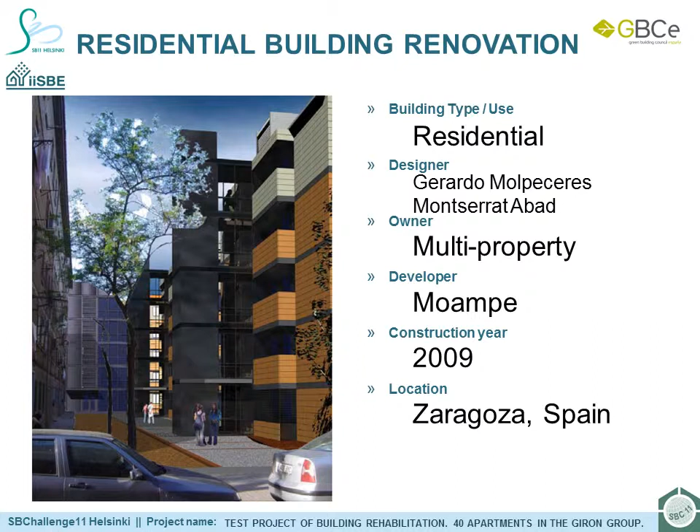Sustainable assessment of 40 apartments in the Girón Group building using Verde tool. The building belongs to one of the consolidated districts of the 50s and 60s in Zaragoza, Las Fuentes. These urban areas have a high compactness and density and a good level of equipment and social cohesion. However, these districts show lack of green areas and parking, low accessibility and very bad thermal insulation in housing spaces.

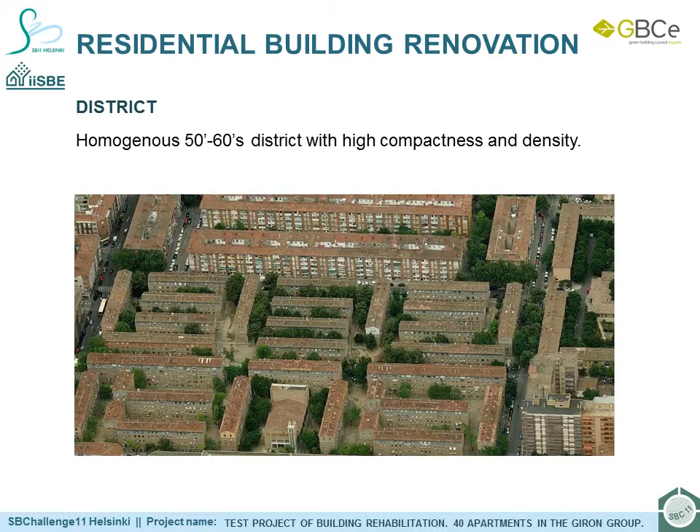The district in which the building is situated has been the subject of two preliminary studies carried out by the City Council. The first one describes the social and urban situation of the neighbourhood. The second one shows urban rehabilitation proposals based on a social and technical analysis of 8,000 residential units.

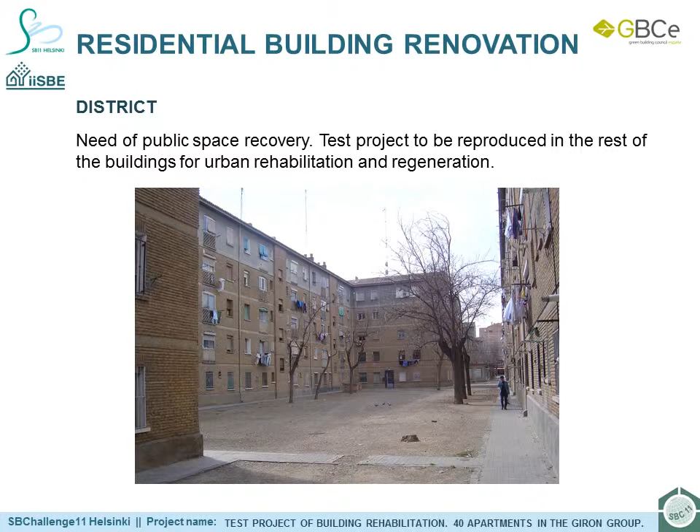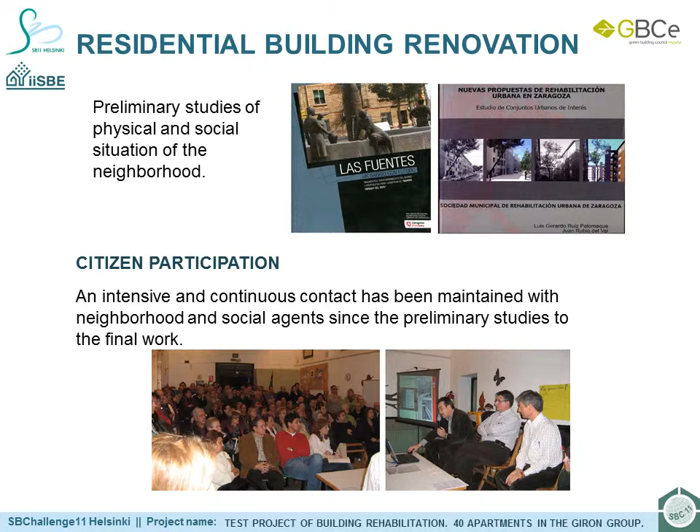The citizen participation has been a very important element during the whole renovation process. An intensive and continuous contact has been maintained with neighbourhood and social agents from the preliminary studies to the final work. As a result of these conditions, a test proposal has been carried out in a 40-dwelling building. Urban and public spaces surrounding the building have been of a great significance for the project, since the main aim of this programme is the urban rehabilitation and regeneration of the district and other similar neighbourhoods.

The original 5-story building is L-shaped and has 4 entrances which give access to 10 dwellings each, 2 dwellings per floor including ground floor. The residential units are very small, as well as the staircases. They were not equipped with elevators. The facades in brick are a common element with the rest of the buildings of the district, which give them a strong character.

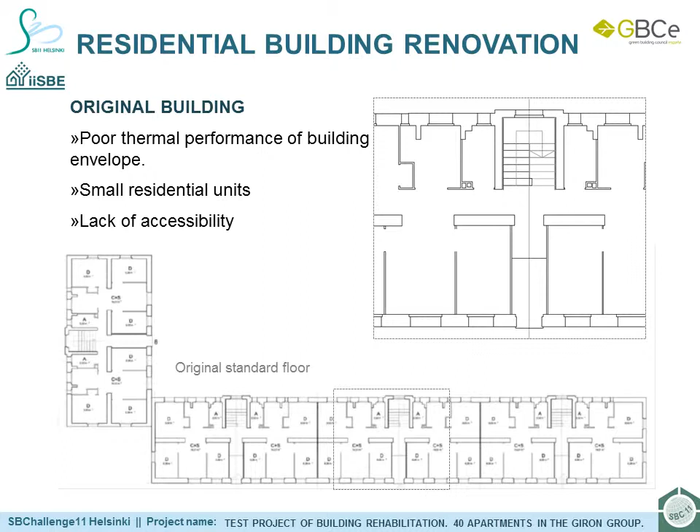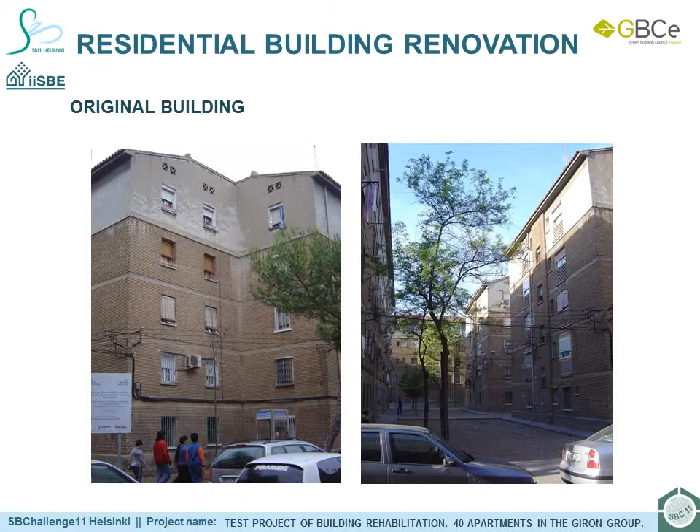The project responds mainly to the need of a severe improvement of the thermal performance of the building by means of increasing the insulation level of facades and roofs. The aim is to act only on common elements of the building, and always from the outside in order to avoid a transferal of the residents, and to avoid a decrease of the small surfaces of the dwellings. At the same time, the brick character of the facade must be kept.

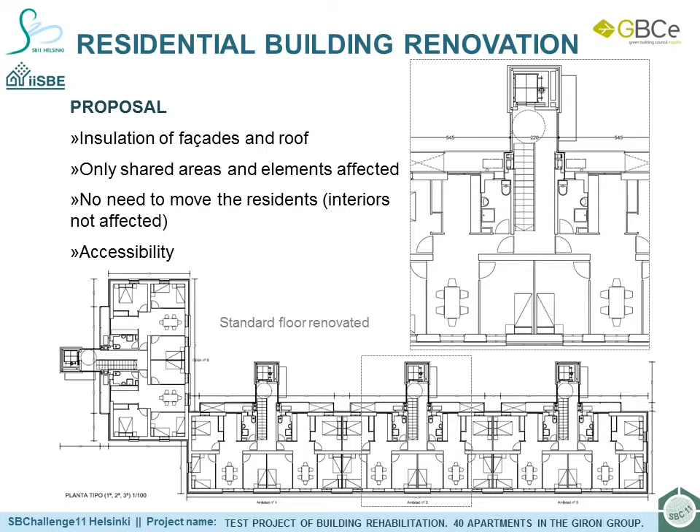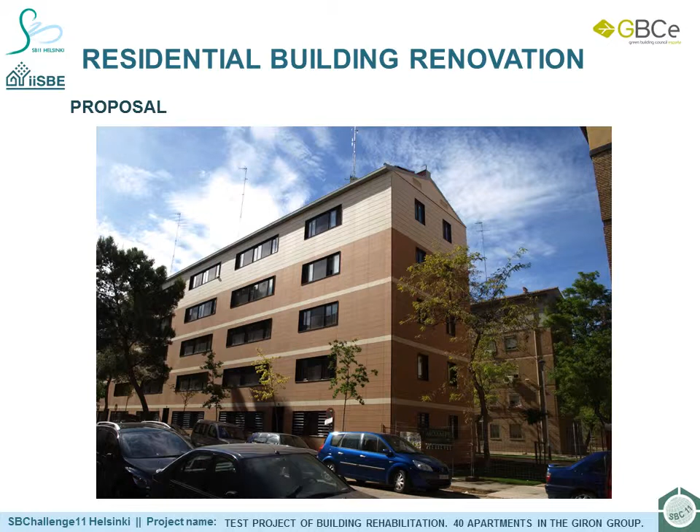For all these reasons, the solution chosen for the facades consists of a ventilated wall anchored to the original one, which is entirely kept. The finishing for this ventilated wall is in ceramic plates, keeping the brick look of the facades. Finally, the improvement of accessibility conditions was also one of the main goals of the proposal. 4 elevators were part of the project, for whose installation the staircases were slightly modified.

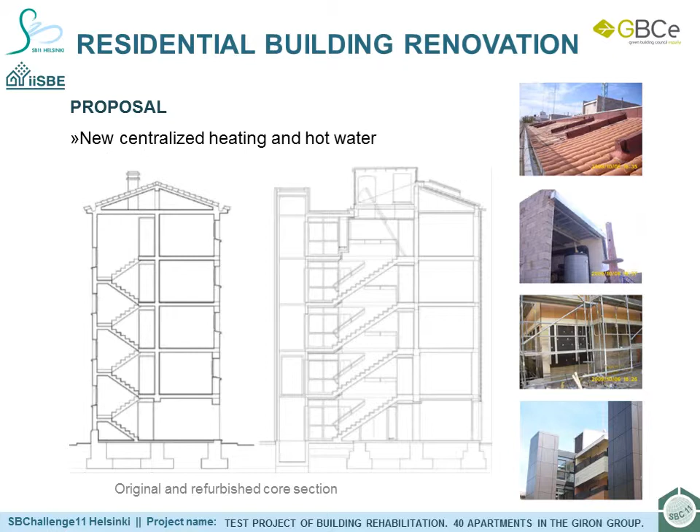The original heating system was individual for each dwelling, with a very poor performance. All the energy services of the building have been replaced and reorganized. For each group of 10 dwellings, a new centralized heating and hot water was put up, fitted with gas boiler, solar support, and independent heat meter for each dwelling. Along with the introduction of the elevators, the areas needed for the new services have required a careful design and the optimization of shared areas. 2 new volumes in each staircase house the new facilities.

The project has been evaluated by Verde tool, developed by GBC España. This tool allows the evaluation of new construction, residential and office buildings, and it is planned to permit assessment of the building on the life cycle. Verde is focused on the integration of Spanish and European regulatory standards, New Building Code, CTE, Código Técnico de la Edificación, and the implementation of the Energy Performance of Building Directive, EPBD.

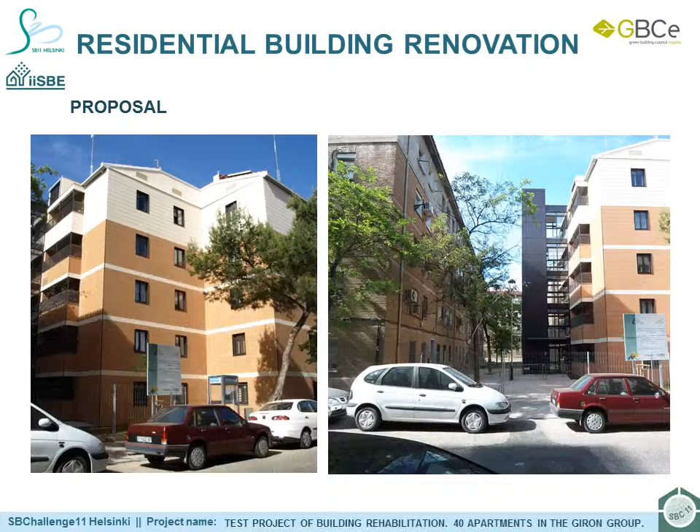The Verde assessment is based on building impact analysis, calculated as impact reduction compared to a reference building. The list of impacts was defined in accordance with CEN/TC 350 WG1 Assessment of Environmental Performance of Building, Calculation Methods. Since the project consists of a building renovation, the site selection has been determined by the nature of the intervention. As a test project to be reproduced in similar buildings, a very well-oriented building has been chosen. Also, the project was focused on the recovery of quality public space, ready for a real use.

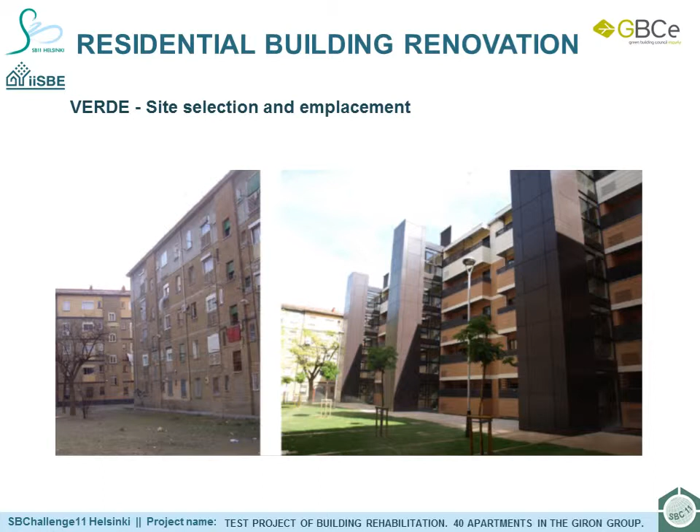One of the major goals of the proposal was to improve the thermal envelope of the building in order to reduce the energy consumption regarding the original situation. Along with the good performance of the new energy services and elevators, the improvement of roof and facades insulation enabled a great energy saving. For equal conditions of comfort, heating consumption goes from 100 before to 26 after renovation in winter, and from 100 to 37 in summer. The consumption of warm water goes from 100 before to 38 after renovation.

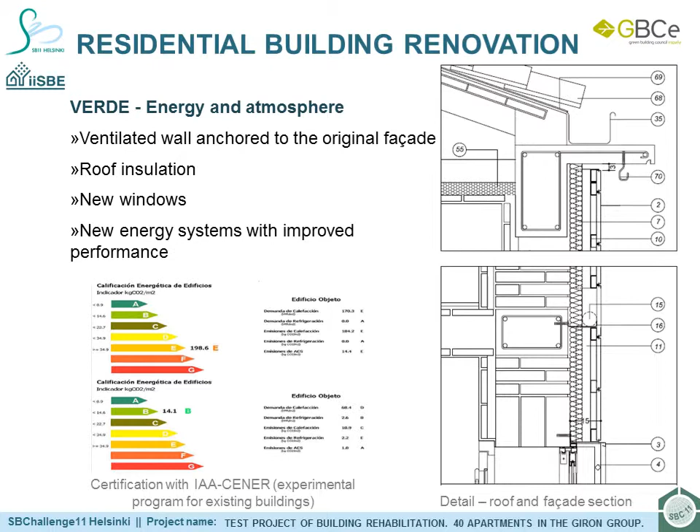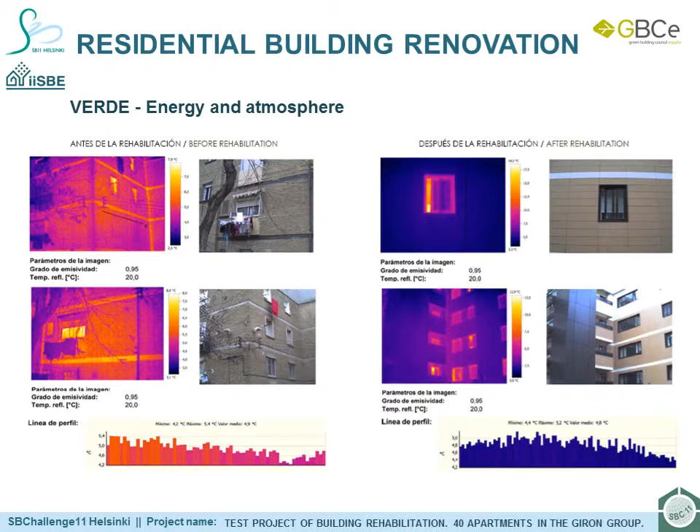The renovation has been certified with the experimental program IAA-CENER for existing buildings. The building goes from qualification type E, 198 kilos of carbon dioxide per square meter, to qualification type B, 14.1 kilos of carbon dioxide per square meter, after rehabilitation. Nevertheless, for the evaluation with Verde, the certification was calculated by Calener VYP, the official recognized program for the Spanish energy certification, getting only in this case a D, 18.9 kilos of carbon dioxide per square meter, which does not reflect the real level of performance achieved.

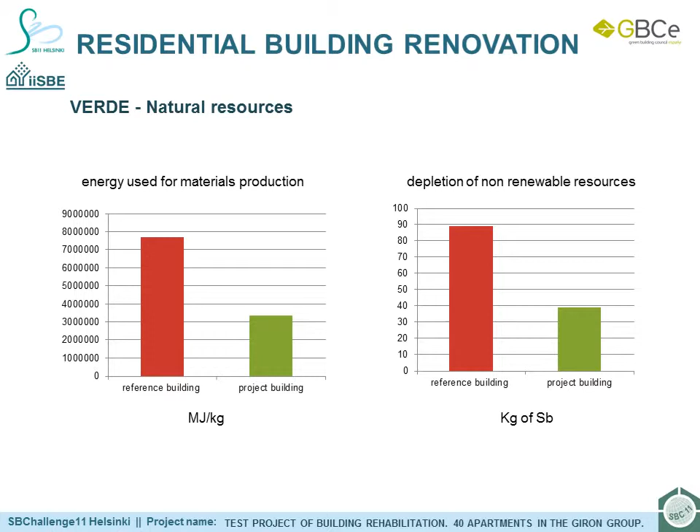Compared to a conventional new building, the nature of the retrofit enabled to reduce the embodied energy of the materials by 56% and by 60% the amount of carbon dioxide equivalent required to produce them. Besides, almost 71% of the materials used have a local origin, less than 200 kilometers away from the site. Due to the external character of the renovation, the dwellings' indoor conditions have been improved only in terms of thermal comfort. The improvement of accessibility conditions was one of the main goals of the proposal. By means of 4 elevators, absolutely all the dwellings are completely accessible.

In economic terms, the amount of money invested and the grant awarded by the City Council made the retrofitting affordable for all of the residents. The costs of works were €38,000 per dwelling. The total cost, including urbanization, project and management, was €43,000 per dwelling, and the average aid was of 75%.